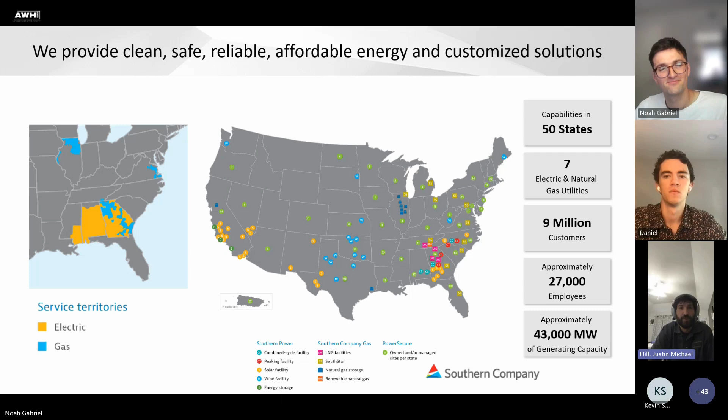But my role is within the Southern Company Research and Development Team, energy end use, which is now storage and energy end use technologies: how do you take products that are out on the market, how do you integrate those into Southern Company, how do you value them, and how do you make them operationally beneficial. I'm within Southern Company Services, which is more of a shared service, so I'll work with Alabama Power, Georgia Power, Mississippi Power, and the gas company sometimes. But my focus is almost exclusively on the electric side. So you can go ahead and go to the next slide.

And so looking at this one, Southern Company is focused in the Southeast U.S. So it gets hot here in the summer. It's hot today. It's been an even hotter summer than normal this year, I believe. When you think of our geographic location, you think of hot summers and not necessarily cold winters. But while that's still true, our system has become and is continuing to become more winter peaking. The heat pump penetration is fairly high relative to the rest of the country.

Our marketing teams over the last 3 decades really have been doing a good job of getting heat pump penetration into the market. That has its positives, but the negative side is on January mornings when it's 15 degrees outside and everybody's heat pump is switching over to strip heat, it causes our system to peak out in the wintertime. So we have summer needs of reliability, but almost all of our reliability needs are focused in the wintertime.

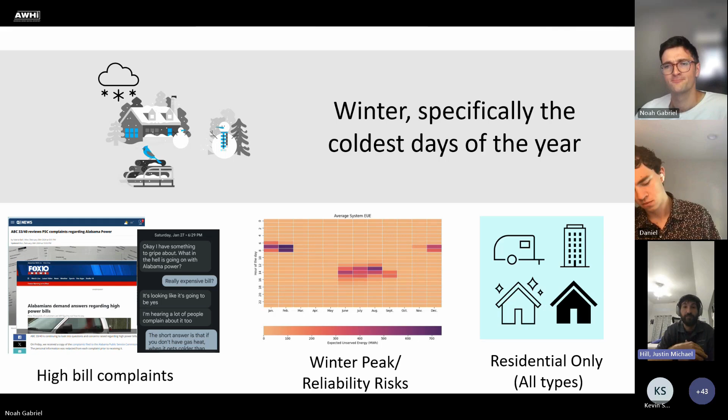Next slide, please. And so to address that, we are now, and I guess have been for a while, through all of these pilots, looking at different ways of how do you address that winter peak, and to a certain extent the summer peak as well still, and how do you do that both actively and passively.

So it's, I guess, not such a secret around our business model and how things work. So just thinking through how these benefit not only the utility but the customer. And so the passive side, just more pure energy efficiency, tends to benefit the homeowners or the customers, because you're using less kilowatt hours and your bill becomes less. So that's good for us, as long as it hits the certain times and the certain windows in the day when those kilowatt hour sales are expensive, or it can reduce the capacity needs and all those different types of things.

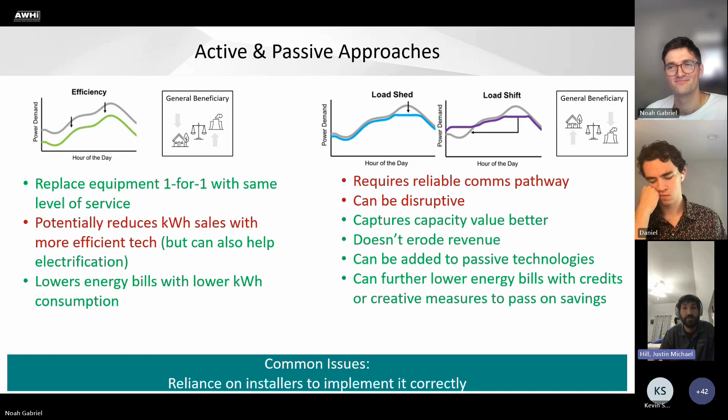So when I talked about the benefits back to Southern Company and our operating companies of how you use water heaters and getting away from just the couple hours a year demand response and moving that into something that is more 8760, much more frequently used, but balancing that with not impacting anybody's ability to have a hot shower or having warm water when they want it. So making sure those two things can play together.

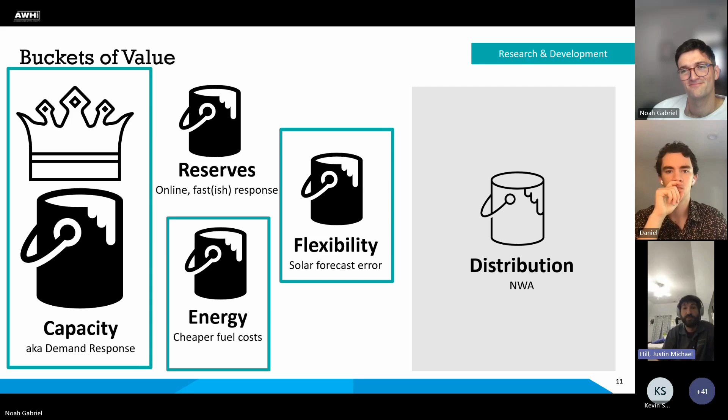And then there's other things you can do in addition to that of energy arbitrage and daily load shifting and moving things on peak and off peak. And then flexibility, taking that one step further and receiving a signal of, for example, the solar production in South Georgia, can you control a fleet of heat pump water heaters to go the opposite of when the solar's really overproducing? Can you dump energy into heat pump water heaters and those types of things? And so next slide. But the projects I'll talk about are all leading up to those three that were highlighted.

And so this one is just to maybe date myself and show how long I've been working in this area. But my first project within Southern Company's R&D team was an EPRI collaborative on developing and building out CTA 2045. I guess at that point it was CEA 2045 still, but the general takeaway being we've been doing this for a while. I've been within this position 12 and a half years or so. And this project actually started before I did within our organization.

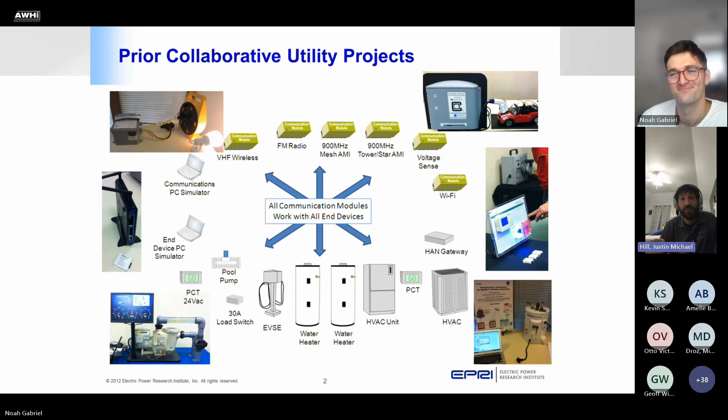So Southern Company has been trying to think of ways to get water heaters connected, and focusing at first on the state of where technology was in 2012, I guess it was when I started, and so where technology was there and how we could get one appliance and different appliances connected. So that project, I guess it's still ongoing a little bit with EPRI and with different utilities, but you can go to the next slide.

That CTA 2045 project where we were really involved with EPRI and with many other utilities to develop out the standard and the testing of the standard and those types of things, it really started the conversation internally, so outside of the R&D group, within Georgia Power, but also Alabama Power, of maybe there is something to this. If we can get connected water heaters, can we do something with it?

So this project here, I should remember the years, but it was about the 2017 timeframe of working with AutoGrid to do a demand response, a DRMS approach of aggregating and integrating with the Rheem water heater API and bringing in data and allowing us to send signals, and so forth. Demand response is just pure load shed in my head, but then the next step is to do some preheating and modifying the load shape that way. So this project did a little bit of that, and it hit around the preheating in the early winter mornings and then letting the tank ride through those events.

And we went in and ultimately just ripped out 100 perfectly working water heaters and replaced them with 70 heat pump water heaters. You can see there the different sizes, and then 30 of the new at the time Wi-Fi connected Rheem water heaters that are electric resistance. And some of the takeaways were capacity. So I've mentioned the slide before where capacity is the largest value back to us and will most likely be that way for a long time.

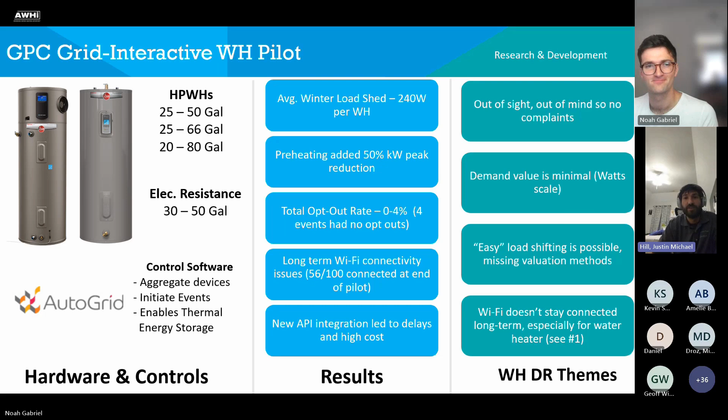So next slide. And while you're changing slides, the Wi-Fi issue there that I forgot to point out. I believe at the end of the project, about half of the water heaters had dropped offline, and that was a 1-year pilot program. And we went on site and had Southern Company or Georgia Power people within their houses to connect their water heater to the internet, and over time things just dropped off.

It's kind of the downside of that out of sight, out of mind thing that we've seen. You can get the demand response value without impacting their day-to-day lives, but it's also out of sight, out of mind enough that if their water heater goes offline, there's not a big push for them to go reconnect it.

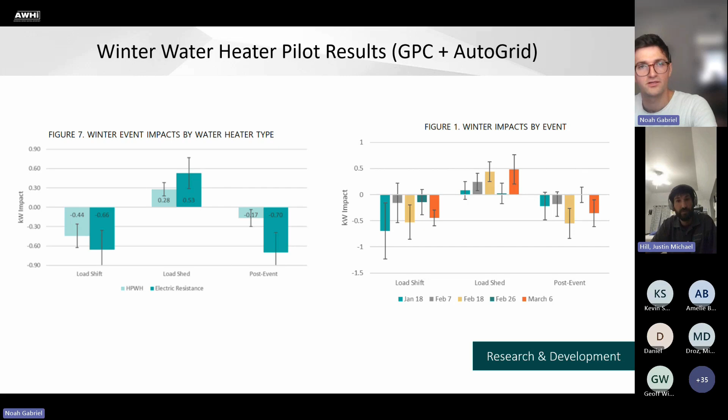So you can go ahead and go to the next slide. Awesome. And yeah, I love these charts, Justin. I can't take credit for making them. Let's see.

Yeah, this is not where I remembered it being, but this one really highlights the Wi-Fi connectivity issues that we had. The Georgia Power Smart Neighborhood number's a little misleading because it includes more devices than just water heaters, but in our first pilot that I just talked about, roughly half of the units were disconnected after a year. And then in the other project, 16 out of 46 homes were fully communicating after about a year. That's another scenario where we went in and physically either plugged things into the Cat5 cables or connected things to Wi-Fi and had things just drop off over time.

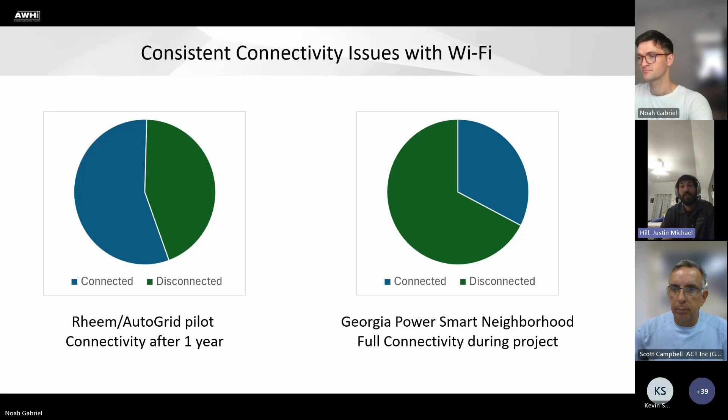And I say it's a little bit misleading because to qualify in that 16, the water heater had to be connected, but also the solar and the battery and the 4 thermostats and the energy metering equipment. So I don't know the breakdown of which is which, but the general takeaway is that we've seen a lot of connectivity issues relying on residential customer Wi-Fi to ensure the connectivity of these things, and that's the point of the slide. So, next slide, please.

So for this one, the Alabama Power heat pump water heater load shift. So, all right, the smart neighborhoods. I guess I'll jump back to explaining a little bit of where these numbers came from and where the Georgia Power project came from.

So there's 2 initiatives that are officially wrapped up now within Southern Company, looking at how you have a community of grid interactive efficient buildings and how the devices within those houses can work together to provide grid services without impacting consumer preferences: comfort, convenience, and connectivity. Making sure the boxes are checked, so you're still delivering hot water when you need to, and the temperature in the space is what you need it to be, so you're not making people uncomfortable, and all those things work together.

Paired with 2 different models. So Alabama here, you can see the results of the heat pump water heater, but they also had a community scale solar and battery about a mile down the road, electrically directly connected into the neighborhood, where these heat pump water heaters were trying to coordinate their energy consumption with the solar and battery output, both grid connected, and when the grid drops off, it would automatically isolate the neighborhood, and the solar, the battery and a generator would back up the neighborhood.

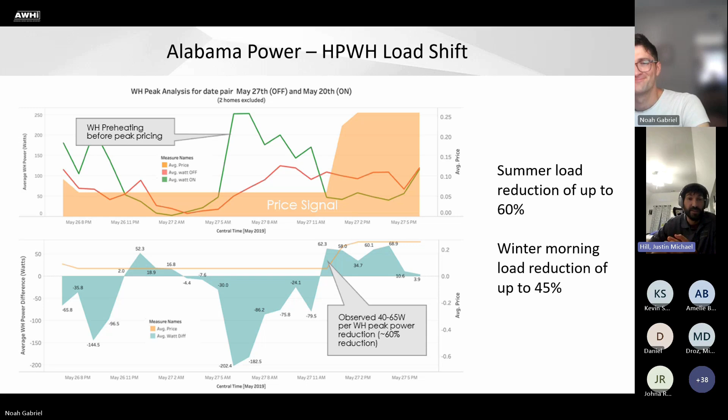And so it's a summer load reduction of up to 60%. Winter, it's about 45%, but if you really dig into that, it's 60%. It's the same story as before of low wattage response. But again, no impact. Nobody noticed that it was happening. You can do all these things behind the scenes and still perfectly deliver the hot water when needed. So it still provides the services that we're looking for, but it does it at a better output. So next slide, please.

So this one, jumping from Alabama over to the Georgia Power project, it's a similar setup, but this one has behind the meter, in one house, battery storage, rooftop solar, a heat pump water heater, and effectively four smart thermostats: 3 Ecobee thermostats and 1 different thermostat. And Oak Ridge was also involved in this one to develop the controls, and this shows some results of how they were taking in an hourly pricing signal and then responding with their controls to manage the heat pump water heater output.

And I should also mention the Alabama project used the Rheem heat pump water heater, so they had more controllability of the set points, and this was pre Rheem having CTA 2045 in their water heater, so it was the pure EcoNet platform, having temperature settings, mode settings, and those types of controllability through that API. And so they had more flexibility in how they could control it.

In this project, it was the A.O. Smith 66-gallon heat pump water heater, with the connectivity through that CTA port, having less to choose from, maybe ultimately the same functionality, but different ways of controlling it. And so preheating shed or load up shed and those types of event driven responses are here, and it shows the results of the winter.

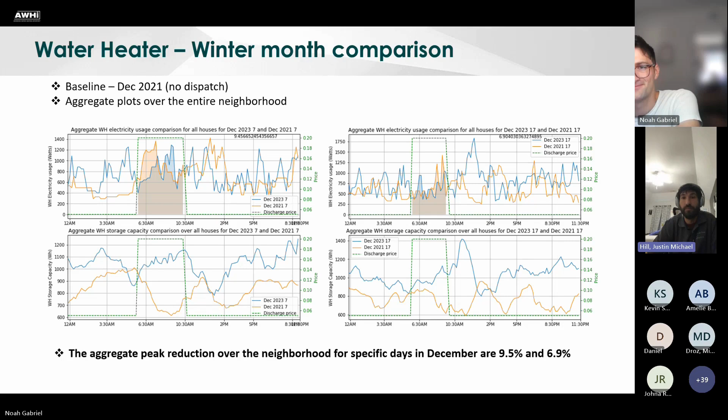This is the same type of results, but looking at it from summer instead of winter. So the hotter it is outside, I guess all of these have been located in the garage. The hotter incoming temperature in the summer still leads to, let's see, a 15% load reduction.

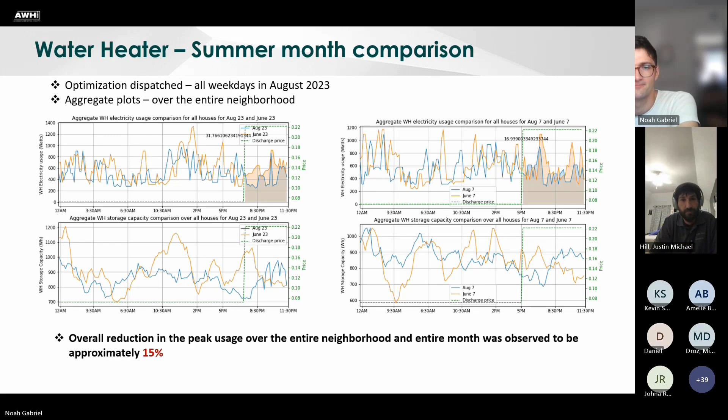Next slide please. So the first three talked about the more active approach of demand response, the more involved demand response, where we had actual controls built for the system to look at forecasted prices, forecasted usage, forecasted temperatures, all those things taken into account, trying to develop a more optimal schedule of how the water heaters operated.

This is from the passive side of pure heat pump water heater technologies. There's nothing really to compare it to here, just the different seasons and the load shapes of the water heaters in the neighborhood, with no controls, just running as normally installed. Alabama was 62 single family homes, and that was less than 20 kW of total energy consumption on average at its peak in wintertime.

Thanks, Justin. And these did have a backup resistance element, right? Yes, correct. Okay, so relatively low average load despite that. Correct. And they were 80-gallon heat pump water heaters, so they had some additional storage capacity built into it.

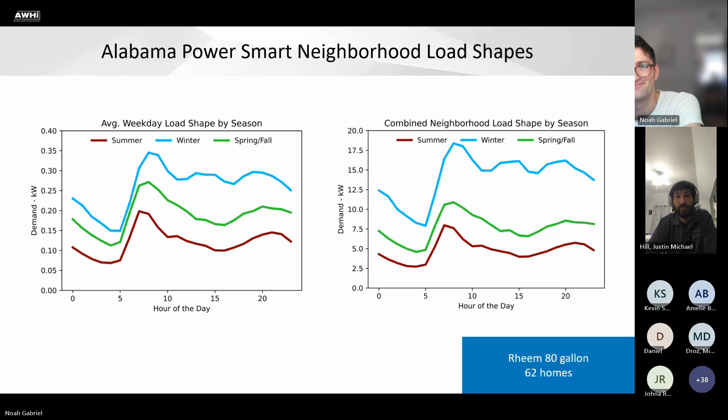Next slide please. This is a similar takeaway from the Georgia Power project, where on the left hand side you can see, I think it's 5-minute average data, might even be 1-minute data, from all the water heaters in the neighborhood, compared to what a typical electric resistance water heater would look like on the load shape, shown in green.

If you aggregate it up to the whole neighborhood, it's very much under the typical demand for that week. But if you look at it from the right hand side, the averaged out values, which I guess is ultimately what matters to us since we're talking in megawatt scales and these are in watts to kilowatt scales, the aggregate value is all that matters. But that aggregate is made up of homeowners with different schedules, operating conditions, and even different settings on the water heater itself that they program, that we had nothing to do with.

You can see the differences in load shapes between 4 different houses in the neighborhood. One looks like their heat pump plus backup resistance turned on for about 2 or 3 days and just ran constantly - we don't have a good reason for why that happened, other than it looks like it did. A more typical one on the right shows the heat pump and electric resistance coming on, meeting demand, and turning back off. Then the 2 on the bottom, where the electric resistance rarely, if ever, had to come on to meet demand, so the heat pump could just run and keep up with everything.

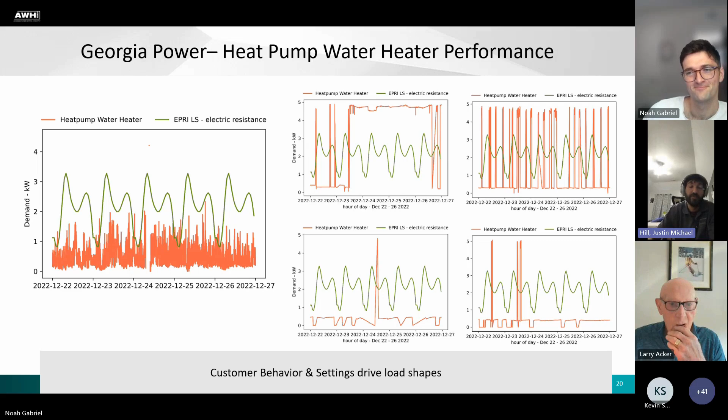So the general takeaway there, I'm not telling you anything you don't know, is that customer preferences and how they operate the system can impact what it individually looks like in their house. But if you smooth it out and average it out, what it becomes back to us is something still more beneficial, or still less kW back to us, than a traditional electric resistance water heater. Let's see, next slide please.

How those two things differ and how they get managed together, how you can take a water heater and put it into more of a home energy management type setup, to where it's one piece of the house energy consumption, and how it can cooperate with the HVAC and the thermostats, and how that can work with the rooftop solar, and how all those things can fit together to provide every service that's needed on the homeowner side, but also doing that at a more beneficial load shape back to Southern Company.

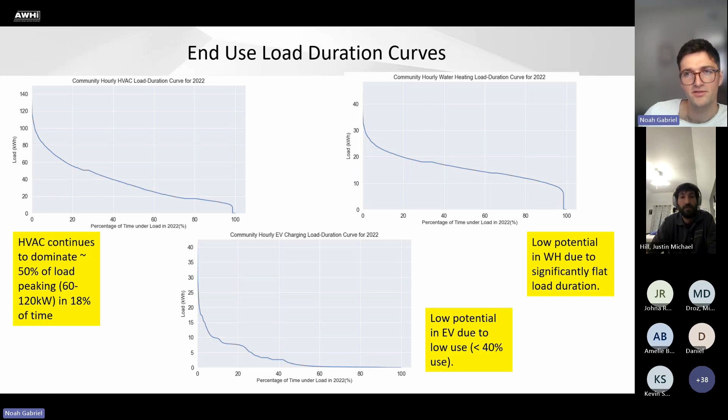Go ahead and go to the next slide, please. Well, I'll try to get moving here.

I think this actually might even wrap me up, but I guess all of those projects led to where we are today, which is we did a lot of pilots. There's even a pilot that I didn't mention that I wasn't involved in, the add-on controls mostly just for electric resistance water heating, looking at it from as many different angles as we could of residential water heater demand response. And all of that has, at least to today, been a bunch of pilots and no programs.

So I think I hit on the main cause of that being the amount of cost to enable demand response on water heaters, paired with the relative low wattage that is received from a demand response event, and then the price of capacity on our end. So all those things put together, there have been more technically economic ways of getting capacity for us throughout, I guess, over the last several years.

I'll say that's a somewhat narrow view, because I at least tried to mention before that we value things on capacity, and that's the 250 watts you get from a demand response event. But there's much more value you can get out of a grid-connected water heater than just capacity, and those are things that most utilities overlook today. The breadth of things you can do with a water heater is bigger, because it's out of sight, out of mind for the homeowner. As long as they're receiving hot water, it doesn't matter.

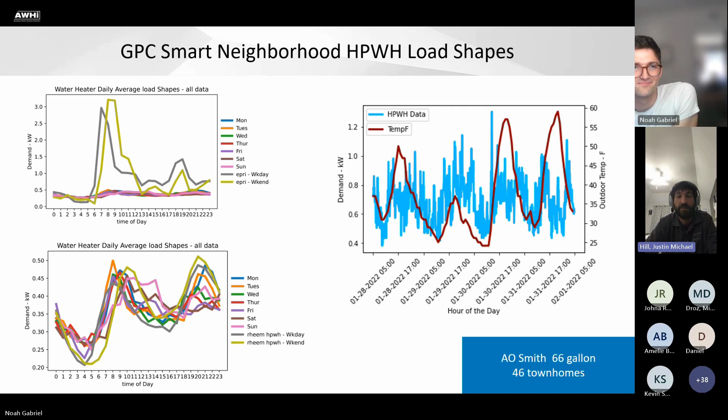Let's see, I think that's it for me. Next slide, please—just to make sure. There's more, but that one's not that relevant, we can skip that slide. All right, I'm going to say that's it for me.

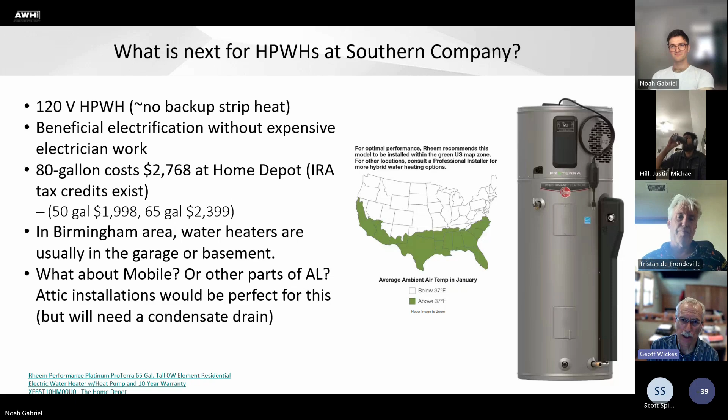Yeah, so I think cellular has its own merits and its own challenges, as does FM radio. But I think there's also some movement afoot under AMI connectivity to AMI meters. But the challenge with AMI meters is there's, I don't know, 40 or 50 different platforms and 40 or 50 different ways of doing it. So I think the cellular radio and potentially hardwire is by far and away the way to go.

We've seen study after study, and Justin, I think you reaffirmed this, that Wi-Fi is not a solution. It's not viable long term. It's great for a short-term pilot, but if we don't have reliability and or utility is using these resources as a peaker plant, which is what they're going to do, they need to be five nines reliable, and a Wi-Fi connection is not that. It's a great answer, Geoff.

Christopher, do you want to chime in too? Yeah, I do. Chris Freeman, Rheem Manufacturing. A question I have is as we've been talking about different communication protocols and CTA and JA13, all these other things, as we talk about the interconnectivity, do we as an organization have a stance or a viewpoint on the cost push down and effect to the end customer? Now we're talking about additional infrastructure costs. How do we pay for the cellular? Who pays for that? We need to come together with a recommendation on how we make this happen.